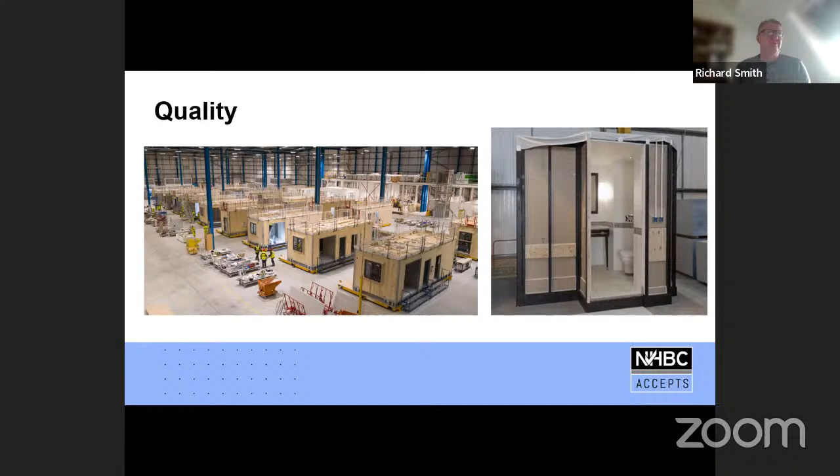So we will talk about risks particular to off-site construction. The key one for me, and I think the one we're all trying to avoid, is that systemic risk of failure. What we don't want to do is incorporate a bad practice into a volumetric build that is then wide scale across a number of dwellings within the UK. So that's the key thing.

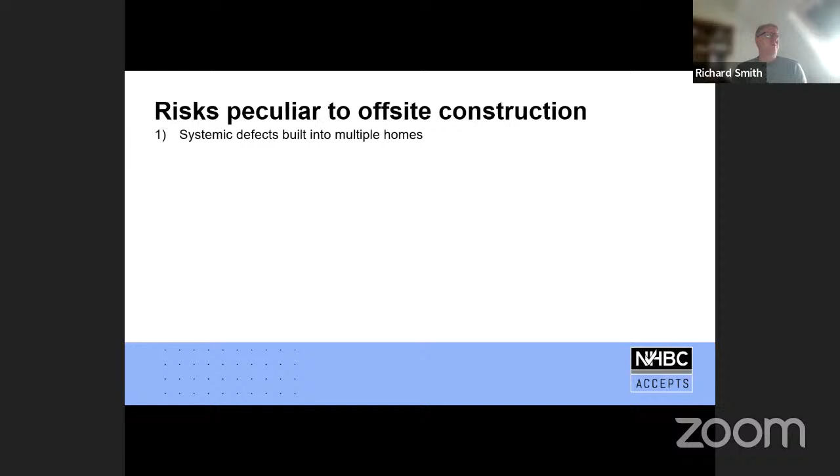A systemic risk is risky to NHBC, but it's also prone to substantial reputational damage to the modern method of construction industry, or the innovative or off-site industry. So that to me is the most important aspect we need to consider.

The other thing we need to look at is the use of new materials, or the combination of new materials. My experience is that, apart from the odd exception, the materials used are not that innovative. How they are put together within a factory can be, and I think that's the slight difference, how they work within a factory, how they work in the format that they are put together.

It could be, for example, that the inner part of the construction is a type we have accepted before. We do require cavities, but we might find the external finishes may be different to what we've seen before, compatible with the inner leaf. That's just one example, or the use of different roofing materials, or different flooring materials, particularly when you've got volumetric and modular buildings. So it's more about the format of how these materials work together with each other in a volumetric or closed panel environment.

This again to me is a significant risk: how a factory produced module or closed panel then interacts with the actual construction on site. It's knowing where one stops and the other one starts.

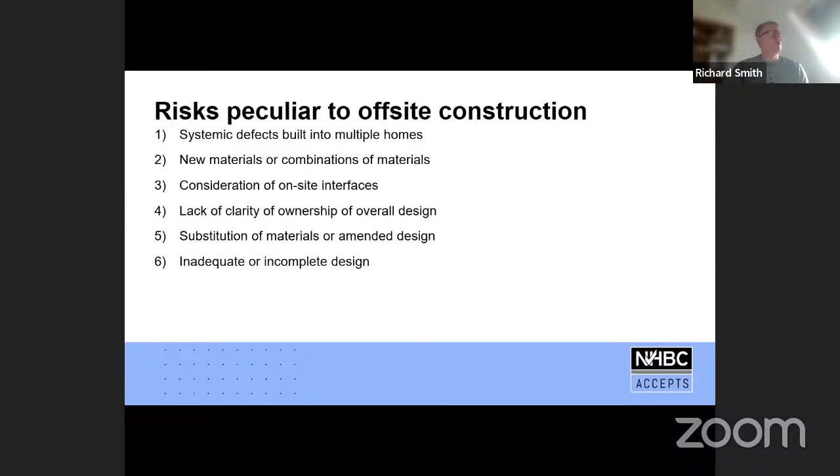And the other one is to ensure that manufacture is good. One thing we want to emphasise today is that, like anything, there is good MMC and not-so-good MMC, and it's important that we work proactively with the good ones, but we don't provide warranties on those that don't meet our standards, especially in relation to quality of manufacture and production controls.

And then we're looking at storage, transport and erection. This is the most important part as well - what we don't want to see is a module or panel system produced in a factory, kept bone dry, and then kept outside for 6 months, or kept on a muddy site for 6 months before it's erected. So the storage, transportation, logistical part and erection is a critical element to that.

And then again, inspection regimes are different, and that has its own challenge, because with an inspection regime the risks are different, so the different areas of inspection are different. That's why we do a number of inspections within the factory. But our risk management inspection on site would focus more on the connections between the modules or panels and the protection of those buildings against weather.

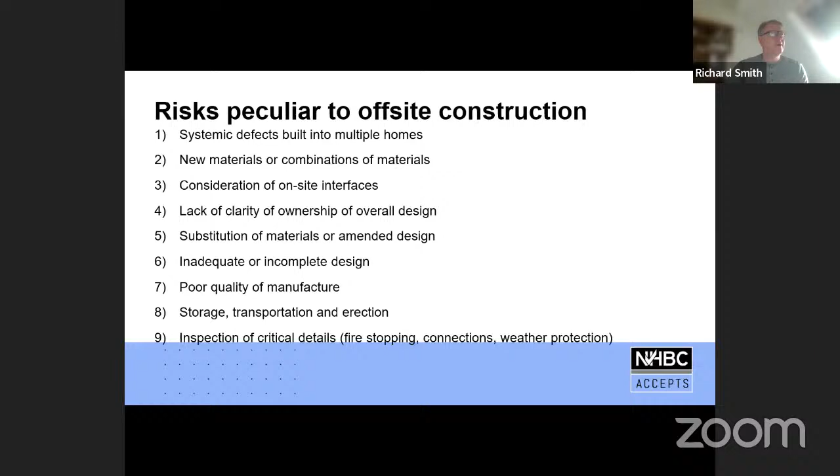So we'll just talk about the process. We have an initial inquiry. We normally do an initial review, because what we don't want to do is just take money off manufacturers who will never meet our standards. So what we tend to do is an initial review, provide a scope to say whether we think there's a likelihood we could provide warranty, put a fee proposal together, and then have a project meeting with one of our specialists and the manufacturer, and talk through the assessment process.

And then we start gathering the information. We then review that technical information, provide a review, give the feedback, and there's probably a bit of to and fro in with information. At that stage we produce the system manual, or the manufacturer produces the system manual, we do together.

And then from there, our construction quality team will do factory visits to check that the system has actually been built in accordance with the system manual, and the manufacturer is capable of building to that system manual. And then from there, we will issue an NHBC accept certificate.

Now, I need to clarify here that what that NHBC accept certificate states is that the system is suitable for warranty. It's not saying that we'll issue a warranty certificate on every building, because it still needs to be built, and we carry out our risk management processes. But it gives the manufacturer an assurity that they can achieve an NHBC acceptance, subject to meeting our standards on an ongoing basis.

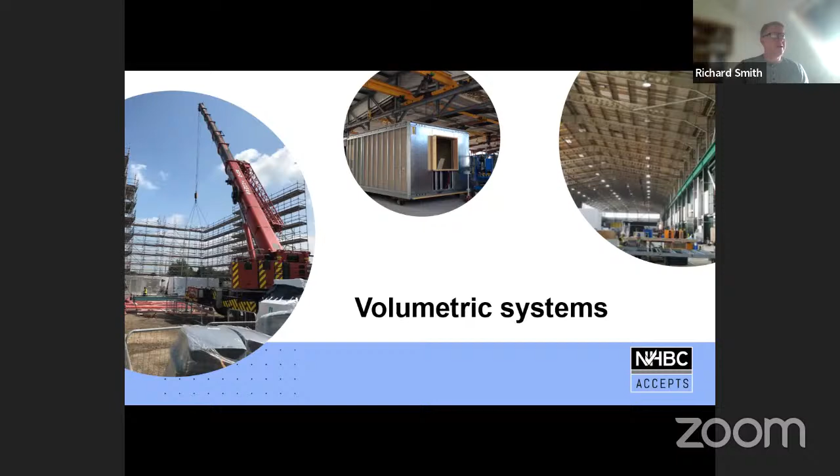And then the other aspect is panelized systems. Now, actually, timber frame is a panelized system. That's an open panel system, and what that means is with timber frame we can physically inspect all the different elements of that on site.

It's when it becomes closed panel and we can't actually physically inspect all those elements, that we then ask that we have an NHBC acceptance or some form of third-party certification.

And so that's a panelised system, and we're seeing quite a wide use of panelised systems. Some developers have been quite innovative to use panelised systems to overcome regional or local skill shortages in personnel, especially in various trades, so that way they can maintain quality during the build.

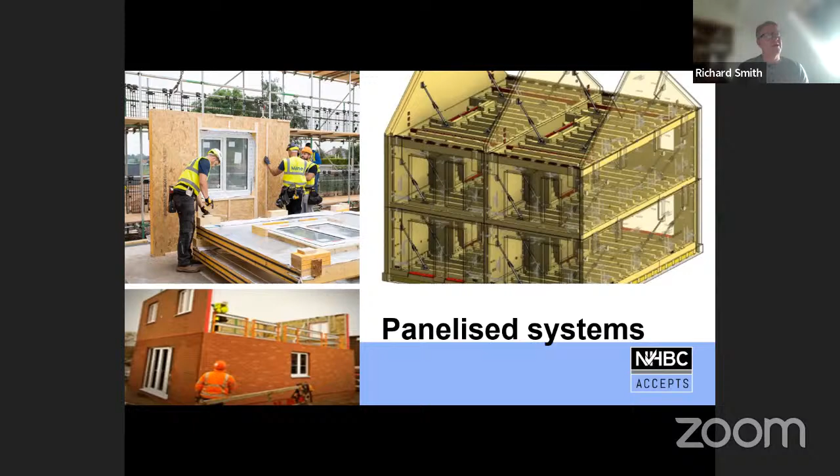And then we look at innovative products. Now this is something that is a bit of a surprise to us, really. We thought that NHBC accepts would focus predominantly on volumetric and panelised, but we have a lot of manufacturers coming through to us with interesting products that say they require an NHBC acceptance to satisfy their customers, i.e. builders and developers, that NHBC will accept various products. And that ranges from composite lintels to non-combustible cavity trays to parapets to brick slips or roofing membranes or whatever. We've even got one acceptance on topsoil, so you can see the variation on that.

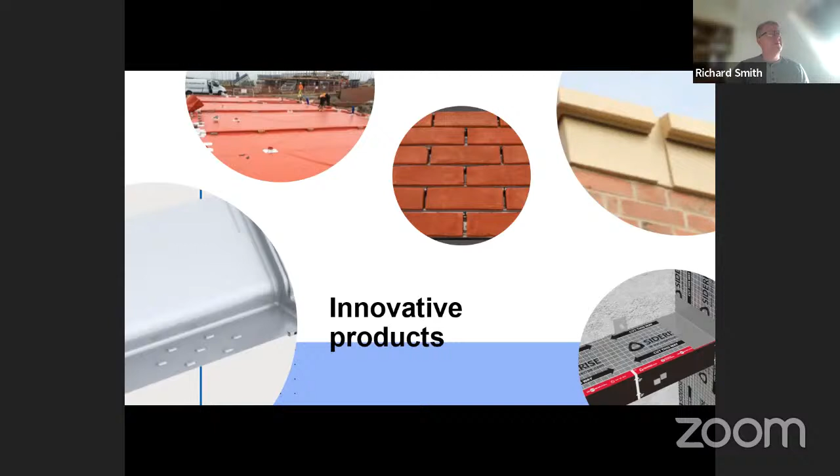So just some key things to consider. Just because it's built off-site, it doesn't mean to say that it's always the best solution. It's important that there is a quality element to the off-site construction. It should have an auditing process and effective factory production controls, and that's quite important because there are a number and a range of innovative manufacturers, but it's important that there is that quality.

So we have to spend more time with smaller manufacturers or smaller developers that may be building something of decent quality but may not have the infrastructure in place. And that research and development aspect requires a significant amount of time.

So predominantly we're working with some of the larger builders and suppliers of MMC, but there are those that are quite small. I've been working recently with a relatively small regional developer who's developed their own MMC. It's a good system, but we've had to look at the factory production controls in a slightly different way to review that.

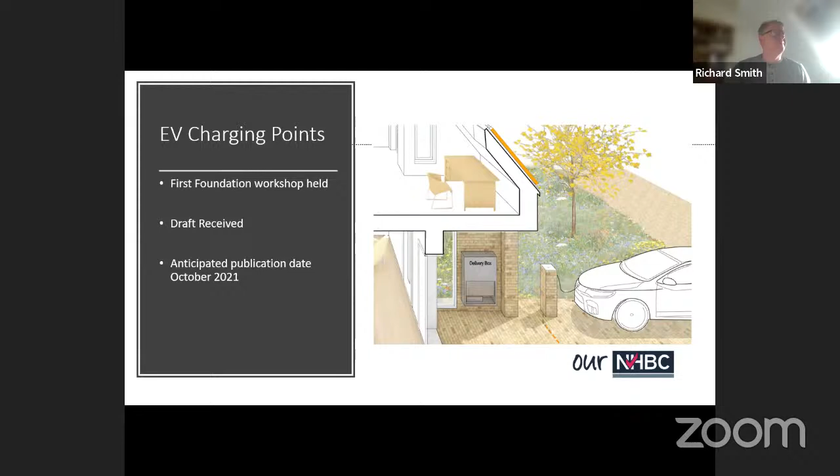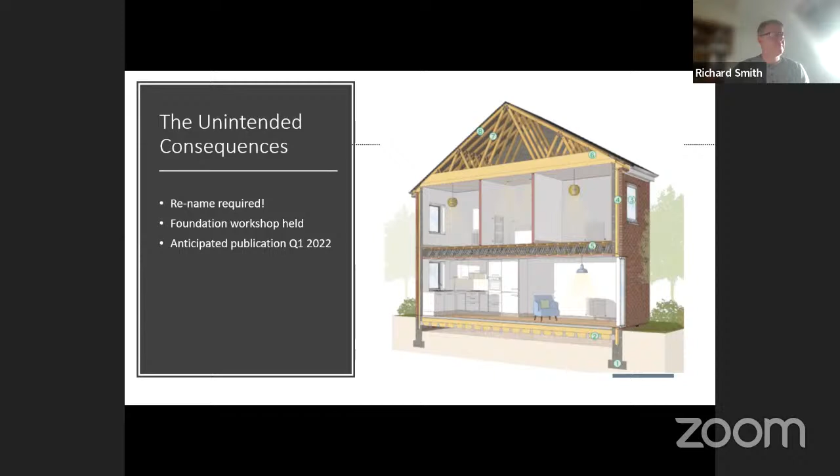Some other publications - we did one with the RSPB on biodiversity, so it's not just about the housing structure that we do. That's gone down quite well, and it helps developers meet planning needs in relation to improving net gain in biodiversity on sites. What's really encouraging is we've got RSPB coming to NHBC next week to tell us how to improve biodiversity at our offices, which I'm really looking forward to - it'll be quite an interesting project.

We're also looking at supporting a publication with the Trees Design Action Group, and we've agreed to support this. At NHBC, I think there's been a myth that we don't support trees near dwellings. Actually, what we do is ensure that if trees are planted, the risk against those trees, such as foundation movement, is mitigated. So what we want to do is work with TDAG to ensure sites can have the required tree canopy needed, while still having resilient buildings against trees.

We're also working with DLUHC, and we've got an initial meeting with DLUHC and the industry to help define the different definitions of carbon and different definitions of energy rating terms. The main reason is to promote consistency across the industry, so when I talk about energy efficiency, everyone has the same thoughts about what that actually means, or what zero carbon means compared to true zero carbon, or net zero carbon, so there's clarity on that. We're doing some work on this, and we've got some meetings in the next couple of weeks.

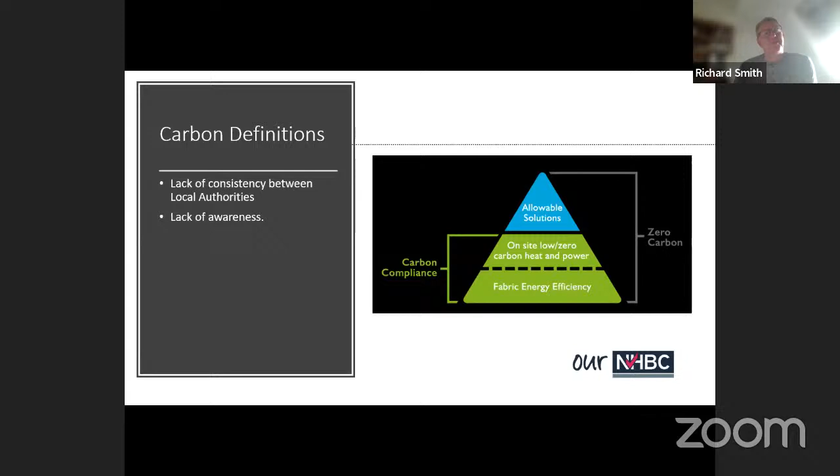One publication I didn't mention that we're working on is one on ground gases. We know that insulation thicknesses will increase on ground floors as we go forward, which means gas membranes, where there are sites with gases present or a risk of gas being present, will push further into the ground, which may be outside the scope of existing industry guidance. So we're looking at providing some guidance and practical solutions about how that's dealt with.

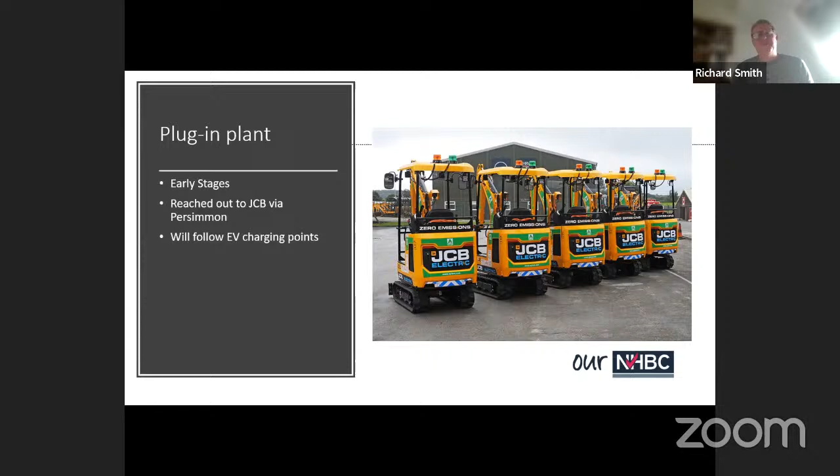Another publication we're looking at, and the final slide for me today, is how machinery can be electrified on sites—not just electrifying our cars, but making our sites cleaner from a carbon point of view as well. We're in early discussions with JCB and Persimmon on that, and it's something we want to develop. That's a very quick whistle-stop tour of the technical update, some information we've gathered from industry, and what we're doing with modern methods of construction.

Thank you very much, Richard. Very thorough, as always. I know we've got some questions coming in.

Should we just have a quick recap on the poll we did earlier, to see if the results surprise you or if they're in line with your thinking? Abraham, if we could have the results up now. How many new plots? 34,000 was the big answer. Does that surprise you? No, I think we were surprised at the volumes as they came back after lockdown, and that's why I wanted to emphasize it's come back quite strong.

Question 2—number of registered plots using MMC increasing 5% is the view. Does that surprise you? I think it did surprise us during lockdown, but I do estimate that will continue to increase, because there are a lot of bodies and organisations looking at MMC in different ways now, so it will become even more widescale, I think.

Let's have the next one—developers switching to heat pumps. 10%. And what's encouraging is that 10% is voluntary. I know you can still use mains gas, and it's probably easier to, but there are developers who are starting to switch, which is good.

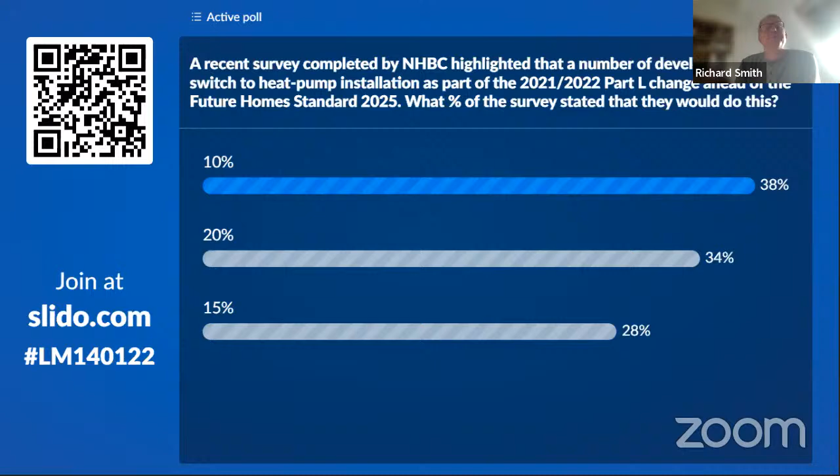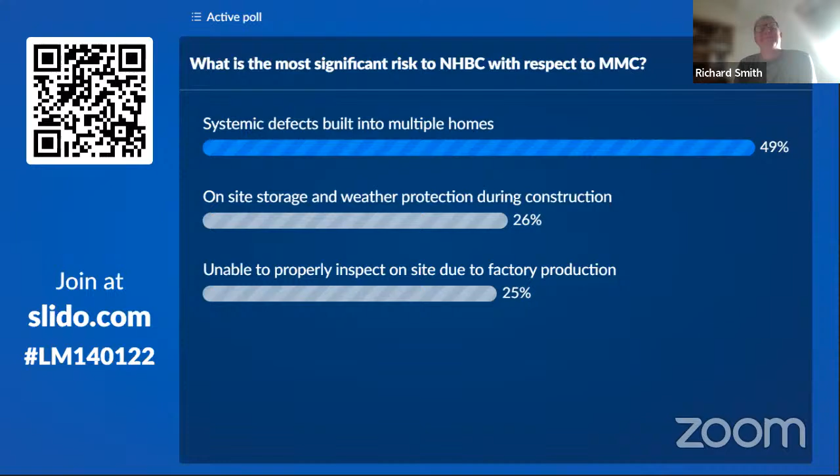What's your most significant risk? I expect they're all risks, really, aren't they? Yeah, they are. But the most significant one for me is systemic. Right, okay, so we've got that right. I think that's the end of the question.

Oh no, we got one more about electric vehicle charging. Sorry, I used the term UK there, but it's mainly England and Wales—it's around that 188,000 figure. But it's starting to increase significantly, and I think it will continue to. The point I was trying to make is the numbers are relatively low, based on orders received by NHBC alone, and I'm not necessarily saying every dwelling will have a charge point since some are communal, but you'll see that increase significantly.

Okay, I'm going to go to the questions. Just before I do, Richard, I've got one or two comments in the chat. Kevin Brocklesby says there are two categories to volumetric systems, Cat 1, 3D, and Cat 2, 2D. Alfred Roberts asks, can we have the slides after the session?

Yes, you can—I think you're doing a PDF version, Richard, for us, which is going up on the Leaders Meets website. David Fleming asks, does NHBC believe the infrastructure, e.g. installers, is in place to facilitate the impending step change to air source heat pumps? Quick answer—honest answer, I don't know. I'd say probably not, but I know the government is doing a fair bit of work with the competent person schemes, etc., to work on that.